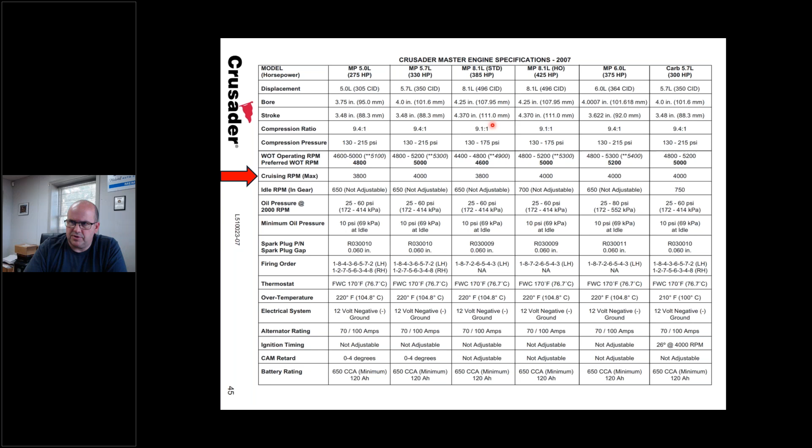So here I am on this sea trial. This happens to be an 8.1 that we redid over the last winter. We're just kind of cruising here about 3,800 RPM. We got a little over 40 pounds oil pressure and we're about 140 on the temp. I'm making sure all that stuff works before we go anywhere.

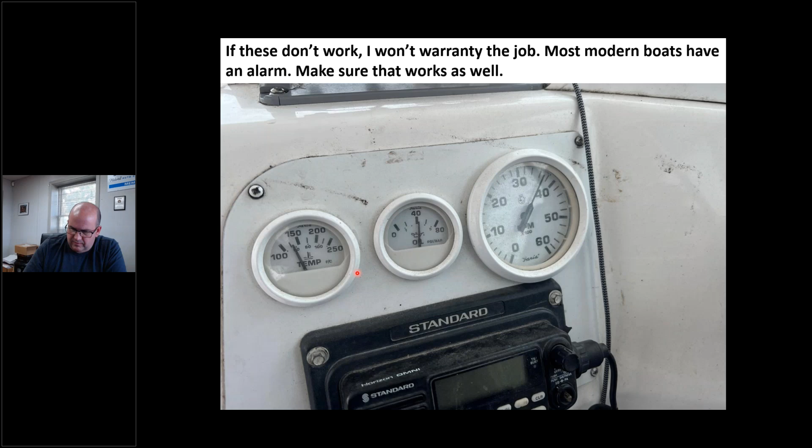I do want to make a comment about some certain gauges. One nice thing that Volvo Penta has done, and I believe Mercury Marine does this too, I can't confirm that, but with the E-Controls controller, EGC and Crusader, if the master slave cable is hooked up, which is basically a cable that connects both engines together via a J1939 CAN bus...

Believe it or not, it'll average the water and oil pressure gauges. For years it's always been a thorn in our side in this industry, especially marine. You might rebuild 2 engines and maybe one engine's got 40 pounds at idle and the other one's got 30. Now most of us engine builders know that there's not a problem with that, but if a customer writes a check for 20 grand, he gets on the phone and says hey man, one of these engines got 10 less pounds of oil pressure. And you know as well as I do, a lot of people judge longevity by the oil pressure gauge. They think a motor that's got 70 pounds of oil pressure, oh this thing's ready to go, it's ready to tear it up. And they think something that's got 10 at idle is the biggest piece of junk. That's what they think, especially on the internet.

But I want you to be aware of something here. I'm not going to read all this to you, but basically they average them together. So both gauges are going to read completely identical in temperature and in oil pressure. If it gets outside of a calibrated number, they will display actual. So if I really do lose oil pressure in one engine, it's not going to sit there and lie to me and tell me that I've still got 45. It will go to actual on both engines. But this is handy.

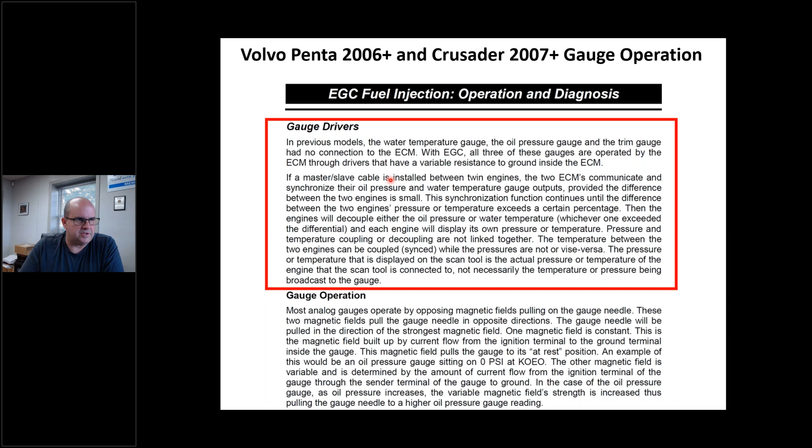I wish this is something we had years ago, because there's nothing worse than a customer saying one engine's running 175, the other one's 165. It's annoying. But I want you to know this is out there, all right? Because you might sea trial a vessel with something like this and think you did the best job in the world, these things are identical on both engines. Well, maybe it did, but maybe it could be the computer too. So I just want you to be aware of this.

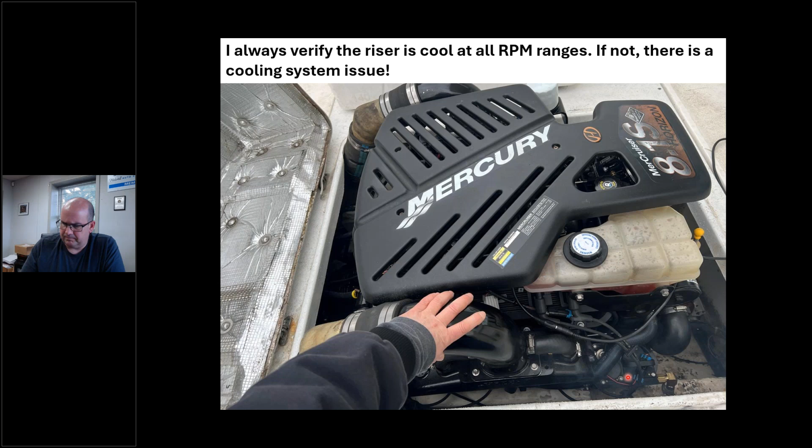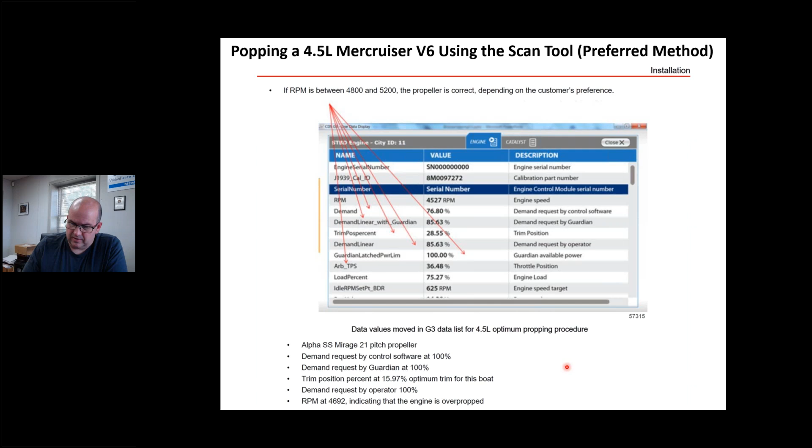And this is basically the same thing. You can read this on your own time, but basically they've got the boat propped right. You see how everybody's 100% here? That's how they can tell they've got the boat propped correctly.

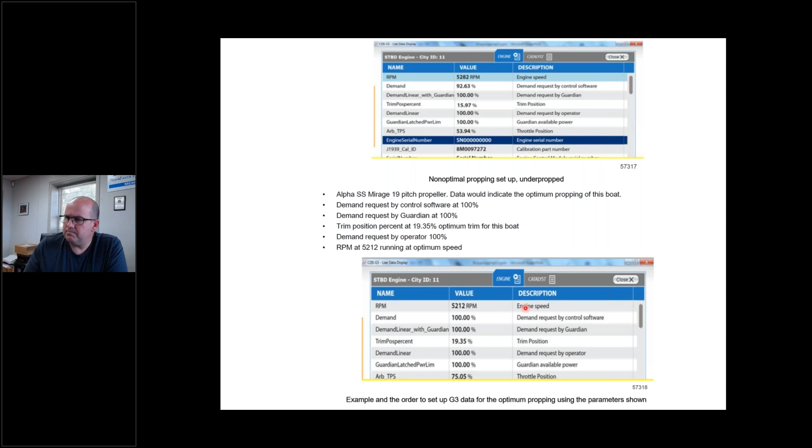But this is what they want you to do, and this is so important. This is why this sea trial is important. We can do the best job ever, we can use the best quality parts, we can put brand new parts, whatever it is. If this sea trial is not done and this thing's not propped right, it doesn't matter what I did, because if it fails, it's all over.

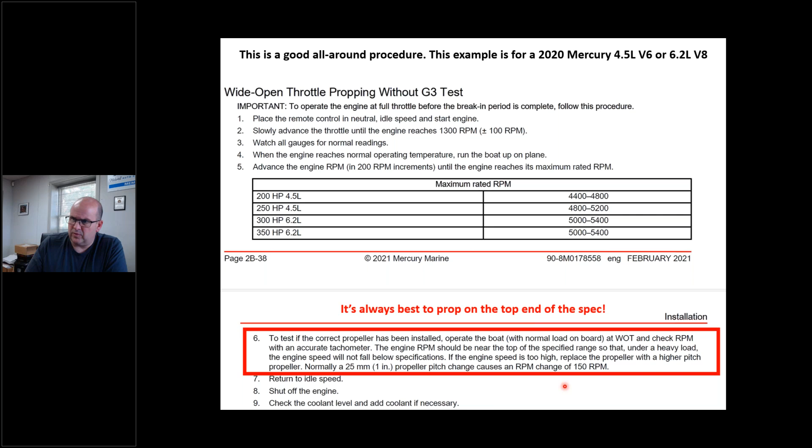Let's talk about high RPM. Why can't I achieve high RPM? I could have something wrong with my engine, that's true—missing cylinder, something like that, fuel problem, ignition timing, whatever. I would say number two is the propeller condition or incorrect size. And when I say condition, people hit rock piles—I just showed you a boat a little while ago where the customer hit a rock pile, screwed the thing up, detonated the engine, ruined everything.

So propellers might look really good to you and me, but I don't have that kind of vision, I'm not Superman. So a prop scan, like an MRI as it's called—if you've got a good prop shop around your shop, those MRI things are very, very good. Or there's good guys with blocks too.

Have them put it on the blocks and make sure, if it's supposed to be a 15x15 prop, make sure that's what it is. I don't care if it looks fine, take it off, get it checked. This is not an eyeball test.

This is something that needs to be checked and balanced and everything else. So one of the questions is, how do I know what the correct prop is? Obviously if you've got some factory info, that would be good. If you know it's a 21 Sea Ray, there's some guidelines, and I'll show you where to get some of that stuff. One of the best spots is a reputable prop shop.

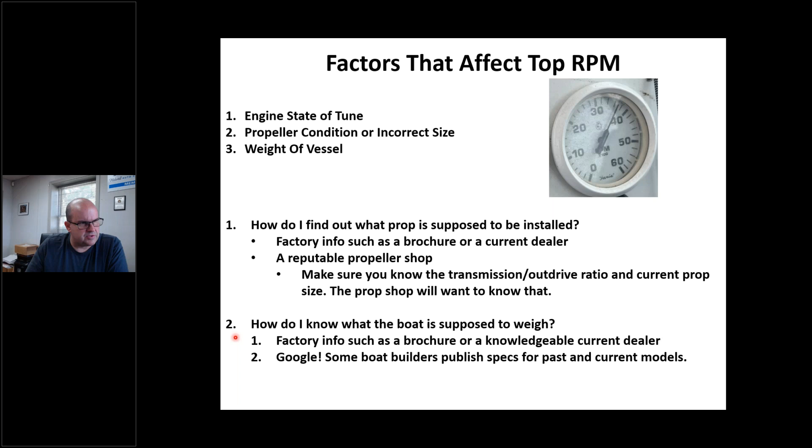And last but not least, we got Google. We use GARP - Google Auto Repair, right? Well, I don't have an acronym for marine, but believe it or not, Sea Ray, which we're going to get to in a second, actually publishes all this information. I'm picking on Sea Ray because there's a lot of Sea Rays out there. But one of the things you can do is go to the Sea Ray website, and I'll show you where to go there in a second.

And this 380 Sundancer 2001 is supposed to have a dry weight of 18,300 pounds. These are kind of nice boats, I actually kind of like these. They're big, you can get diesels in them, but most of these things had 8.1s or 7.4s depending on the year.

But look at this - 275 gallons of fuel, you know what that weighs, right? You got another 70 gallons of water, the holding tank's 42 gallons. A lot of weight, and honestly that dry weight figure is basically without all that included. So that's pretty heavy.

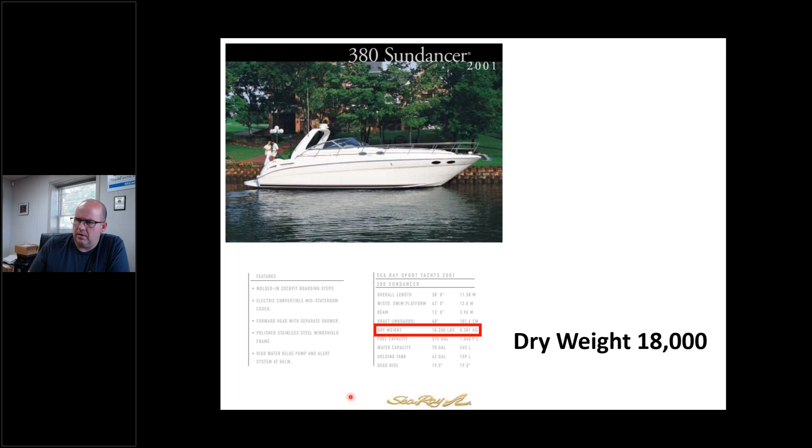So dry weight, we'll call it 18,000 pounds, right?

Here's another awesome document on this same site. You can go back. I just picked this 2004 200 Sundancer, with a 4.3, 220 horsepower. Look, it tells me the ratio of the drive, 1.62. It left the factory with a 14x19 stainless steel Vengeance prop. Vengeance is a Mercury name, and they want it turning 5,000 RPM. That's what that prop should turn. And here's the Sea Ray part number of the prop.

But you can go down through here, there's all kinds of stuff in here. This is handy. If you want to know what something is, to me, this is free information. Anytime I get something for free, I'm all about it, okay?

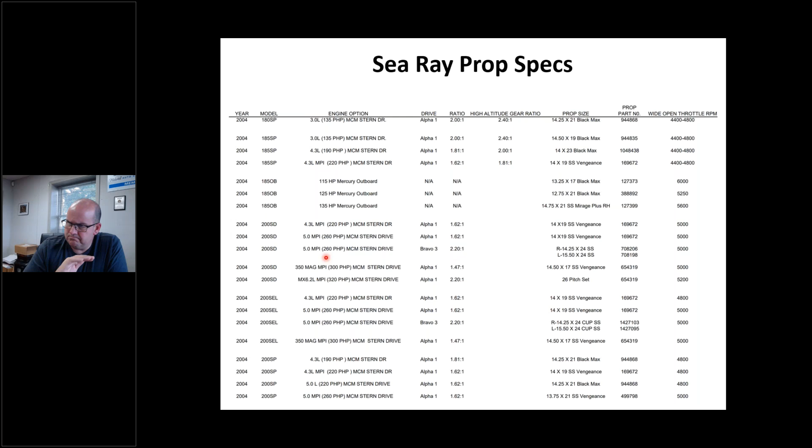Let's bring in a problem child. Check out this 1997 Sea Ray, it's a 370 aft cabin. That's the AC, it's got the drapes, the whole smash in here, okay? Generator, and it's got the 7.4 310 horse engines in it, the L29s. This thing was a dog, all right?

Now, we did not have to do the engines in this, but I assisted the dealer with this. The problem is it couldn't get top RPM, even though it had the props the sheet said it was supposed to have. It was about 400 RPM from the top. This thing can only turn up about 3,800 RPM. This engine should turn 4,200, approximately 4,000 to 4,400 specifically is what this is supposed to turn, both engines. And both engines wouldn't turn up.

Of course, the customer says, I've got the prop that it left the factory with. I bought the boat brand new, yada yada.

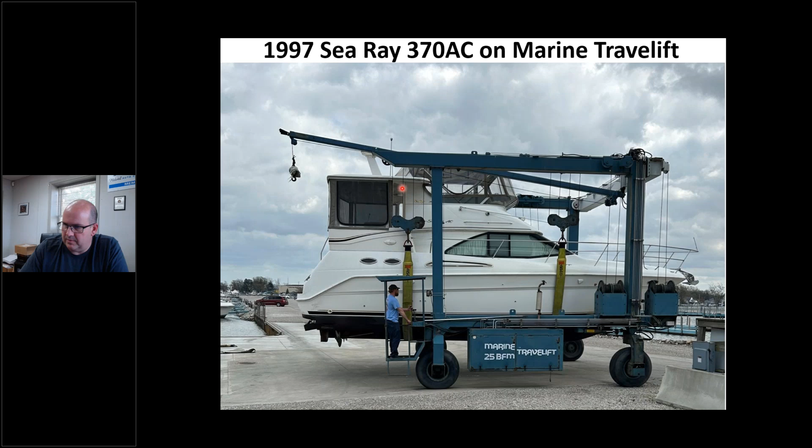The reason I bring this up is these marine travel lifts, if you've got a good marina that actually maintains this, okay, we all know in a marina, just like an airport, the worst things are the ground equipment, the tugs, that stuff. The airplanes are always dialed in maintenance-wise, but everything else in an airport's junk. Same thing in a marina, everything's good except the travel lift, we don't maintain any of that stuff. But 9 out of 10 times, if you got a good marina, there's actually weight gauges on these, and this is an easy way to weigh this boat. I can't take this to the lumber company or our cement place on a trailer and weigh this boat. So luckily, our marina friends here, they've got these gauges.

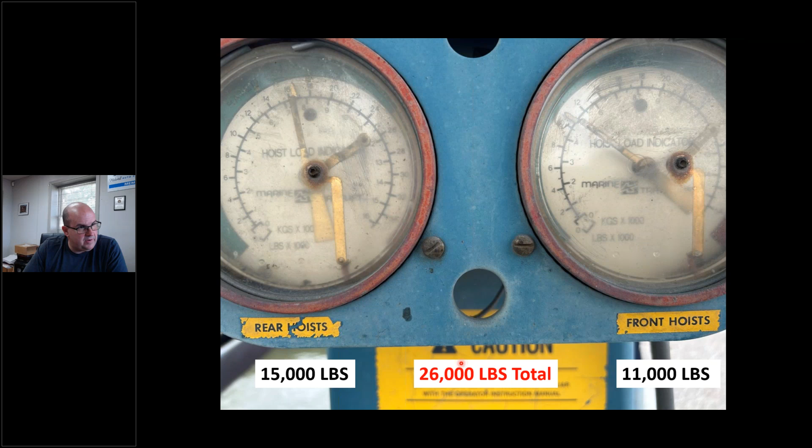On the rear hoist, it's pulling about 15,000 pounds there, and over here it's about 11,000. So this boat weighs 26,000 as is. That's heavy. Okay, what's it supposed to weigh?

You go to searay.com and you click owners, there's an owners tab right here, and they got new boats in here too, they got parts manuals, all kinds of interesting stuff. You click Marine Archives, and then I select, 1997, and I select, it's 36 to 50 foot, and then guess what, here's my sheets. So I click the 370 aft cabin and it says, hey Chris, 23,800, is what this boat should have weighed.

Would you say this is 2,200 pounds over, this thing's over a ton heavier? I mean, you think that's a lot, and that's with no people, no beer, no food, no fish cooler, nothing. So just think this gets worse with 5 more people and the dogs and everything else. So right now, this thing is already overweight.

So you know what has to be done? This boat needs to have pitch taken out. I know what the gospel said, the gospel said it was supposed to have a 22 by 22 or whatever. But you know what, we had to take a couple pitches out of that. It did slow the boat down a little bit, but I told the customer it's the only way it's going to live. As an engine builder, I can't account for this. I cannot account for this. If you want stuff to live, this is what you got to do.

I just want to show you other things other than an engine that can affect top RPM and could cause repeat failures. Because I'm sure all of you agree that that's heavy.

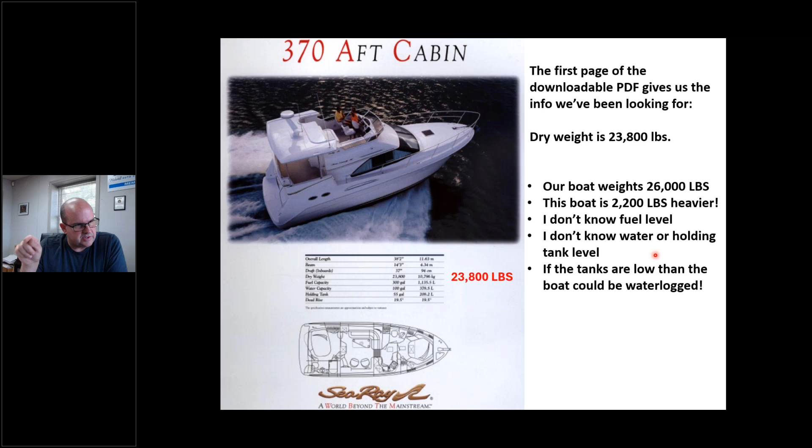I'm not going to say it's common, but it does happen. So now you're thinking, well, the boat's junk, right, full of water. Well, this boat belonged to a friend of mine, because it flunked a survey when he tried to sell it. It's a 1998 Tiara 400 Express with a pair of 3208 Cats in it.

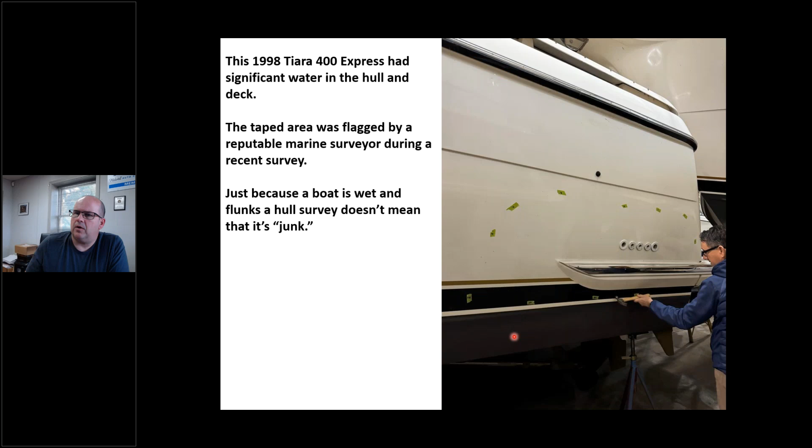But there are procedures to fix this. You see over here they actually taped this out, and they're going to cut this out. I'll show you what they're going to do. They have a system where they blow air in here to dry this thing out. This boat's a 1998, actually a very nice boat, but there are fiberglass technicians that can fix stuff like that. Just because this thing is all waterlogged doesn't mean the boat is a complete piece of junk. Some of this stuff can get fixed.

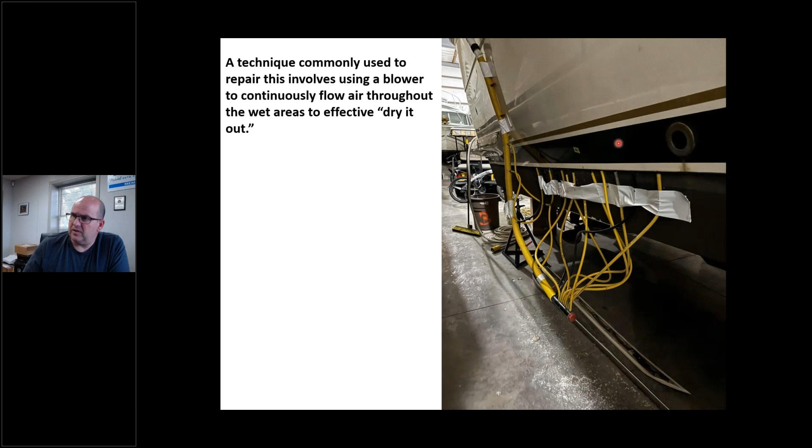See, they cut a hole in the inside here, they'll chop that out and re-glass it. Look at all these little hoses - they're going to blow air in here over the winter. This is in a heated storage facility, and they're going to dry this thing out.

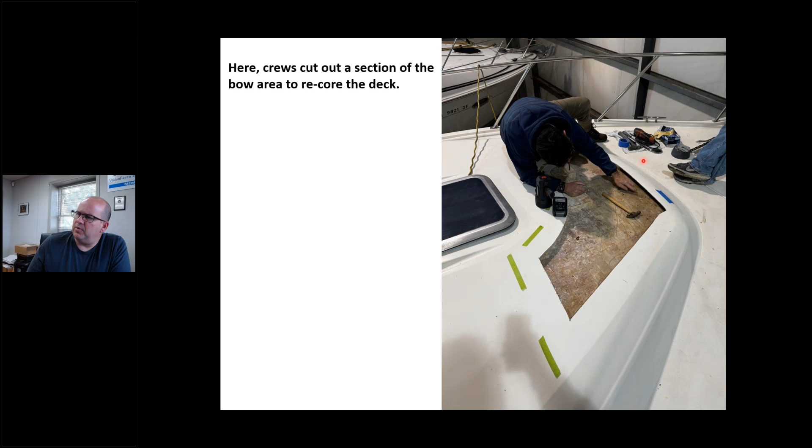The deck up here was soft, full of water - real common by the anchor. So these technicians cut this section of the boat out and they're drying it out. They're actually going to re-core that deck. I just want to show you that it doesn't have to be junk - there are ways to fix it that you probably didn't realize.

So now I'm going to jump into our HVS distributor. We got the boat, we got the top RPM figured out. But I want to talk about this because this is an up and coming problem that's becoming more and more prevalent. Now I'll tell you, this is the world's worst distributor.

These things are junk - plastic housing, nothing but corrosion and moisture content. They're very confusing. This absolutely has nothing to do with ignition timing. I can rotate this thing anywhere - it has nothing to do with ignition timing.

But if I'm doing a long block or starting that motor up, hoping and praying that the marina or service technician is doing his job right, you as an engine builder need to ask this question: you've got to check the cam retard PID. Now everybody has this except Mercury Marine. Well, the problem is Mercury Marine is the most popular engine manufacturer we've got.

So unfortunately, the big man on the street doesn't have any scan tool help for this. I can't tell you how many boats I've been to where this is screwed up, causing popping, causing engines to not run right. You pull cylinder heads off, get tulip valves, put them back on - this doesn't get in right, you got problems. Long blocks, the whole smash.

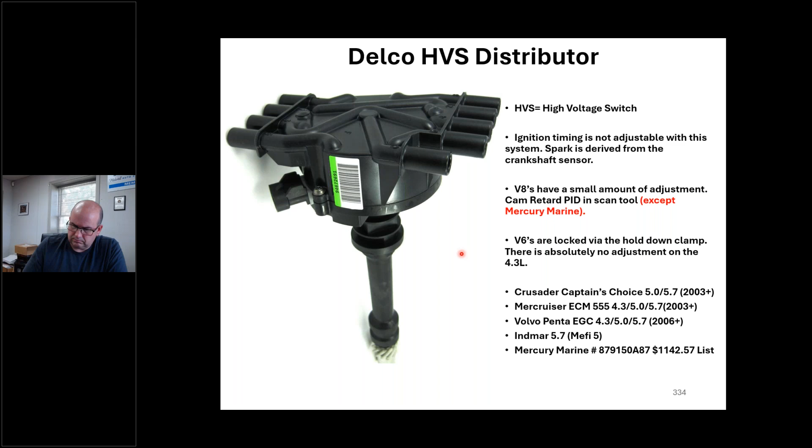I put this sheet in here - I stole this out of a Crusader book. They do make a right-hand rotation engine with HVS. Obviously the whole goal when GM did this, in my opinion, was to keep all the banks on each side of the distributor - left bank cylinders stay on the left side, right bank stays on the right side of the distributor. I think that was one of the goals with this cap.

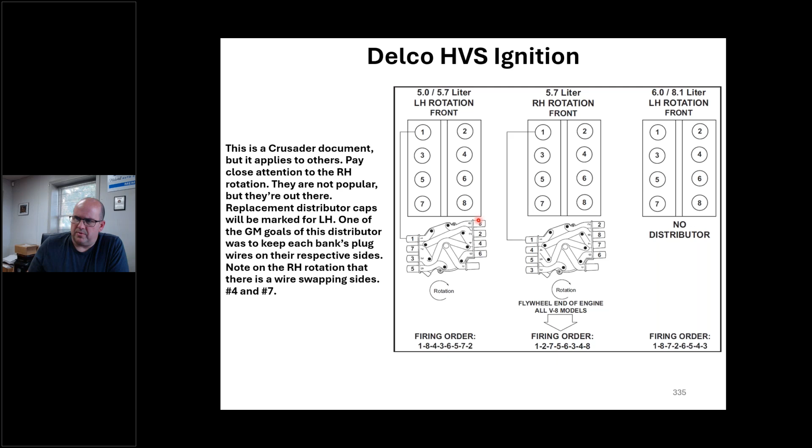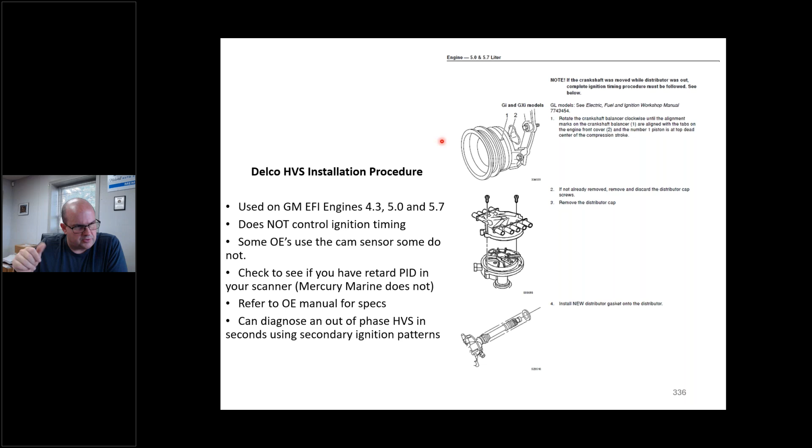It turned out not to be a good system. I'm not going to go over every single bit of this, but I did put it in your handout. This is the GM procedure that's in the service manuals - Mercury, Volvo Penta, Crusader - on how to install this distributor.

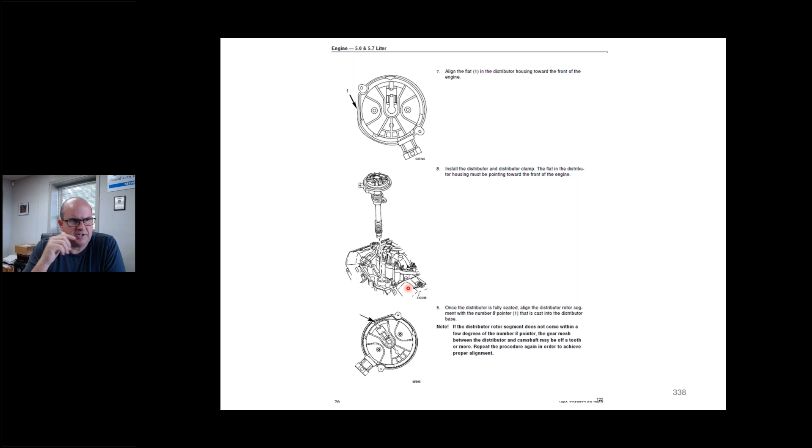Bring number 1 up on TDC. There's an extra dot drilled here, and there's a white paint mark. They tell you how to line the oil pump shaft up, because the problem is you don't have a lot of rotation here. You've got to get this right. It's very easy to get this a tooth off, very easy. So there's a number 8 that'll be marked there if it's a V8, or a 6 there if it's a V6.

Again, I'm not going to read every ounce of this to you, it's in your handout. Download it, read it. It's good information.

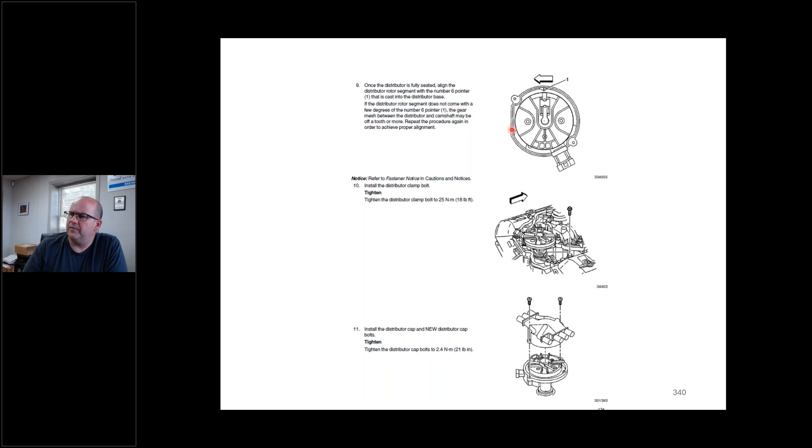I was just at a boat not too long ago that had a brand new, or reman, long block put in it, and it was missing when they got done with it on the top end. The problem was they did not have that HVS index correctly. They screwed around for two months, did swaptronics between the two engines. It was a 31 Sea Ray with 2 V6 Mercs, and they didn't have this in right. That's all the problem was.

If I got an older engine with a Delco HEI ignition, I got to put this thing in base mode, lock the timing out, and set it to base, which is usually 8 or 10 degrees, and lock it down. We don't want to power time this stuff. For the ECM to control timing correctly, I have to have base set correctly. That is super, super, super important.

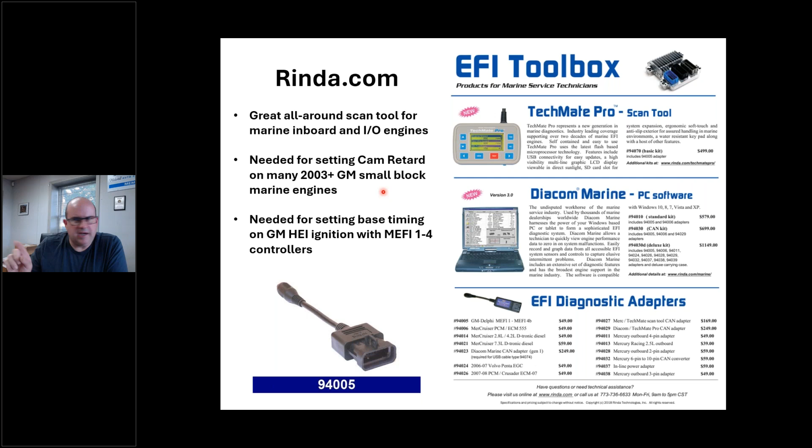But on my 2003 and up small blocks with HVS, I can use this to set cam retard, except Mercury Marine. When I go to the data screen - this is an engine that we rebuilt, and I fired it up for the first time on the floor. It sounded good, ran okay. But look, my spec on this engine is 43 to 47 degrees, and look where I'm at.

I'm at 18. That's no bueno, we ain't shipping this. So we just adjust this real time, and that number updates real time, and you lock the distributor down - the HVS unit - and I always elevate the RPM and make sure that it's 43 to 47 before it leaves. This is a question you should ask your installer, especially if there's problems: did you check the cam retard?

I got a challenge for you: I bet you go to most marinas and most service technicians, you ask them this, they don't know it. They didn't know you can check this, they didn't know there's an adjustment for it. Not all of them, but a lot of them. This is why I'm bringing this to light. This is super, super important.

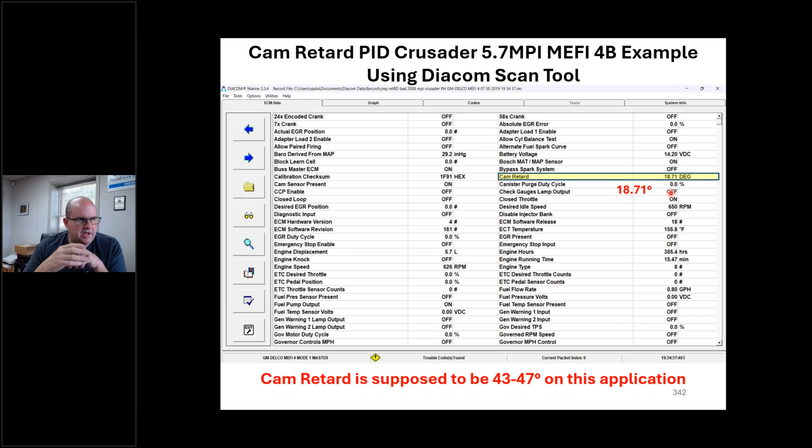That is ridiculous. KV demand should drop in neutral when I rev the engine up. It should not increase. When it increases, I automatically know if it's got an HVS system, the HVS is out of sync. This thing is nowhere near where it's supposed to be, okay?

And what that does, that shortens up my burn time. And that's what creates my misfires, my popping. I've been on boats that sound completely fine, and you'll hear like a pop, like at 3,800, 3,900 RPM. They'll just be sitting there going, and I'll go pop, pop, pop, you know, just randomly.

And this HVS, right? Cylinder heads were done, intake was swapped, whatever, long block was put in. And these guys are going nuts. I mean, they're putting fuel filters in, they're running separate tanks of fuel, they're tuning them up, and this thing's out of time - okay, it's out of sync, I should say, not out of time.

I know everybody doesn't have a scope. I understand that, okay, but I just want to show you what it does to the ignition system, because those coils, the max that they put out is around 30 kV.

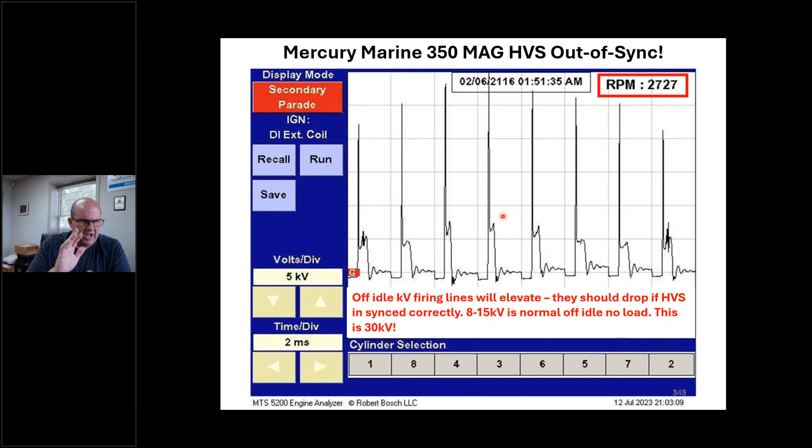And you old school mechanics out there, you ever notice when you had fouled spark plugs or something like that, and you take the insulated pliers and unplug the spark plug, and you watch the spark zap the plug, the miss went away? It's because you drove the KV demand up, right? That KV demand can sometimes get through that fouled spark plug. I know it's an old school tip, but same thing here, right? Elevate the KV, but nothing left to burn.

So we adjusted for the lowest KV. Mercury's got some internal bulletins on this, and it's even in the service manual, right? And they basically say, hey, if this HVS is misindexed by only a small amount, it may cause a misfire, but only at a certain point of spark advance. Okay, and they're right, they're 1,000% correct, I can assure you.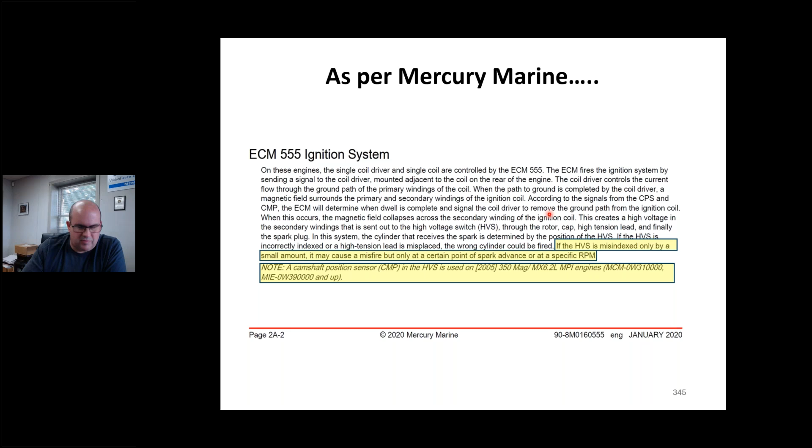Okay, and it basically says, I want to hit this home, right? Timing is not adjustable on any ECM engine, right? Rotating the distributor from its properly indexed position is going to cause the spark to jump to the wrong tower, or it's going to take everything it's got to get it to go. All right, very, very, very important.

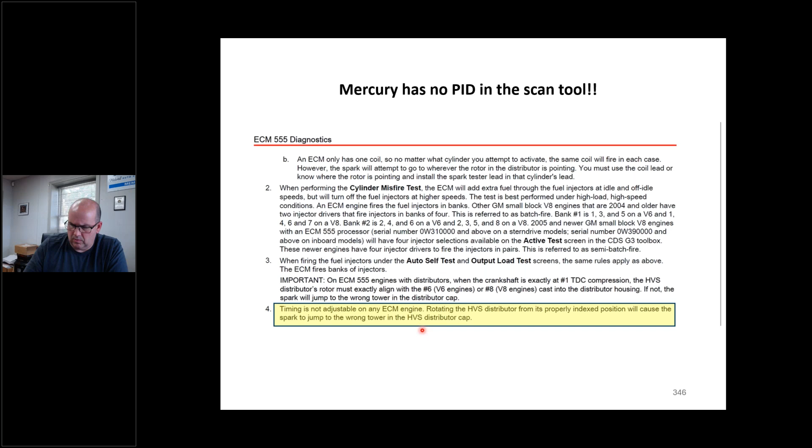Okay, now Mercury releases a TSB in 2011. I'll be honest with you, I've never used this. I know technicians that do. I use the scope, but the reason I'm bringing this up, and I'm spending a little bit of time on this, is because let's say you're building an engine, right?

I'm building an engine, and a lot of times we get long blocks. The distributor comes with us, right? A lot of people like to send engines to the machine shop with everything together. And if I'm putting that distributor in, I don't want to be the guy to be blamed that said it's not indexed right.

Well, I know there's not a lot of Radio Shacks around, but if I go order a couple things, I can order this cam sensor plug, okay, and I can order this 470 ohm quarter watt resistor and an LED and a holder and all this stuff. I can fab up a little winky blinky light here. And if I follow basically what I can do is this thing is self-powered.

Once I bring the engine up to where it's supposed to be, I can adjust this distributor so this light comes on, and that can lock it down. So if you're doing a lot of these engines and don't have a scan tool or don't plan to buy one, this is a good alternative. You can use this on anybody.

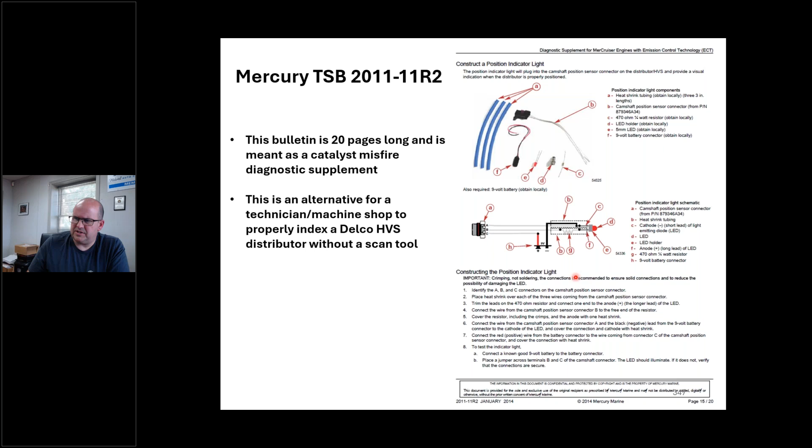You can use it on Crusader, Volvo Penta, anything with an HVS. You can do this on a car. You're building a car motor, you could do the same thing if you wanted to. Okay, because the phasing has got to be correct. I'm not reading you all these things, okay?

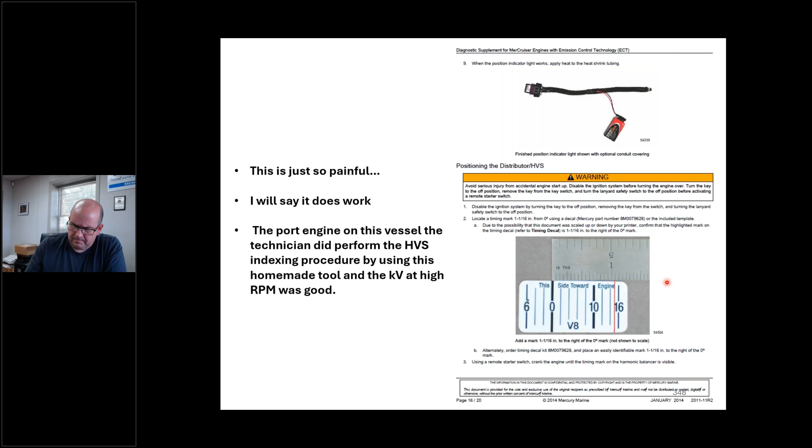They've got these decals you can buy, or you can mark it. They've got a little ruler in here that you mark the balancer, because you don't do it right at TDC number 1. Again, I'm not reading it to you, I'm just putting all this in here. It's right out of Mercury Marine TSB, and it applies to many, many engines.

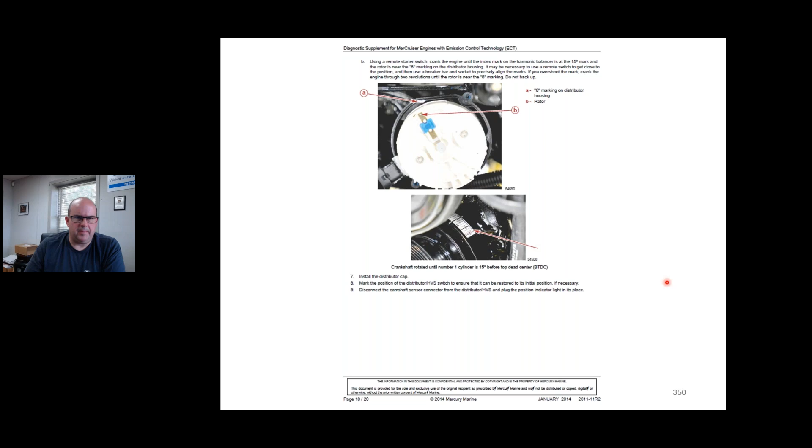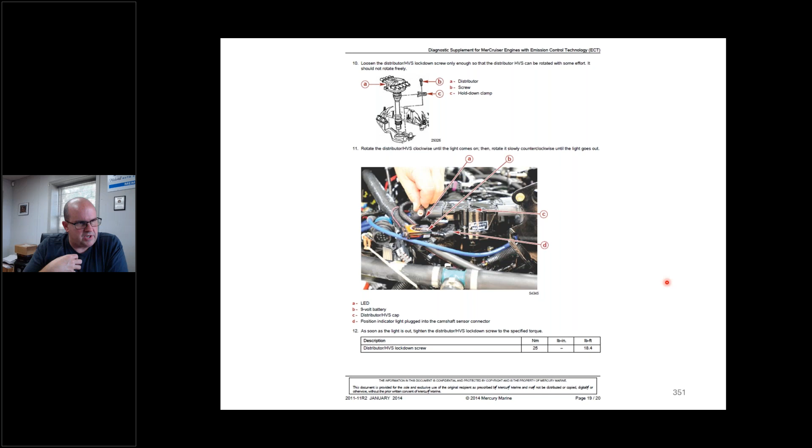And I see this screwed up almost once a month. It's just non-stop headaches. This thing is a real pain in the butt, okay? And I don't want you guys, engine builder or consumer—I know we might have some consumers paying attention too—I don't want a consumer looking at this going, how do I know this is right? And again, you don't want a misfiring engine or an issue, find out the HVS wasn't indexed correctly, right? It kind of makes us look bad.

So again, I'm just putting this information in here for your benefit, so you know. Now, of course, the engines we can check cam retard on, like the Crusaders, where do you get the spec, right? So I'm putting the specs in here for you, most of them. If I got a MEFI4, it's 43 to 47, and that's what a MEFI4 computer looks like if I have a Crusader. I fire up the engine, and again it tells you right here how to do it, okay.

If it's an ECM07 computer, which is made by E-Controls, the spec is 0 to 4. And this is why this is confusing. This distributor is still lined up the same, but the way the software infers this is different. Because would you agree that 43 to 47 is a lot different than 0 to 4?

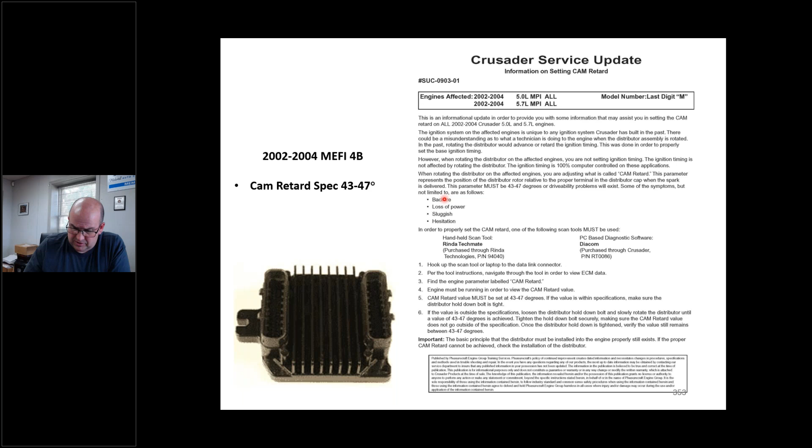I mean, it's got nothing to do with ignition timing. It's got everything to do with how the computer sees the phase relationship of the cam sensor versus the crank sensor. But I want you to be aware of this. This is not—if you're a Chevy truck mechanic, old GM drivability tech—these things were always 0, right? 0 plus or minus 2. The V6s were usually like -5 or -7, something like that. But in the marine world, they're all over the board, all right?

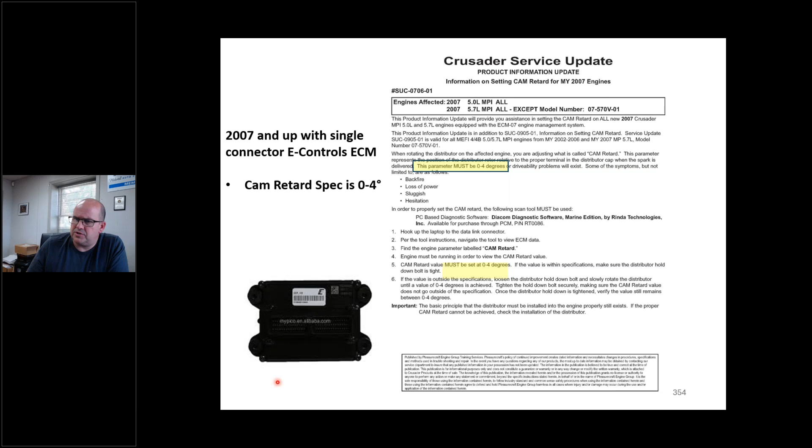They do a lot of gaseous work, propane vehicles and so forth, and a lot of stuff for forklifts and industrial engines. I don't know anybody there, I just know who makes this computer—that's what that E is. But you can see this computer looks eerily similar to this, okay? But I got a completely different spec. So I just want you to be aware of that.

Again, if you've got questions on this, get a hold of me, I'll try to help you with it. I stole this out of one of our diagnostic classes—on an EGC engine, I need both cam and crank to start the engine, okay? And I put some notes in here: -4 to -7 on a V6. The 8.1s read 0 since they don't have a distributor. We got that, you know.

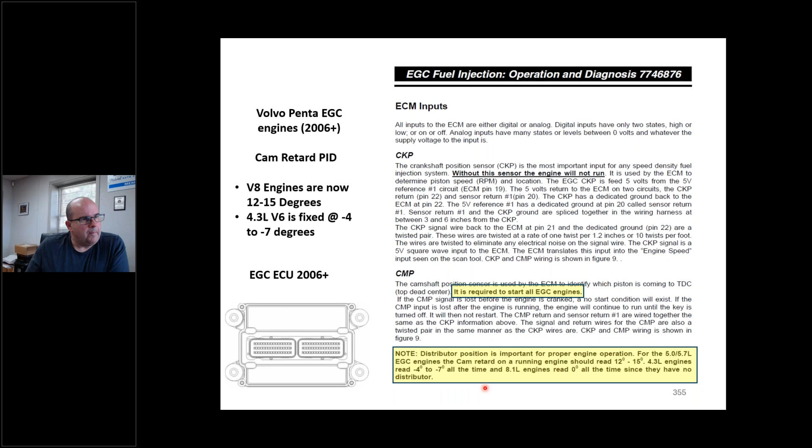So again, look at this—this is a MEFI 5. This is an Indmar engine, very popular in ski boats. Look at this, 705 degrees is their spec, you know. They're not 0, they're not 12 to 15, they're not—you see where the confusion sets in here? This is a pain, this is a pain, okay?

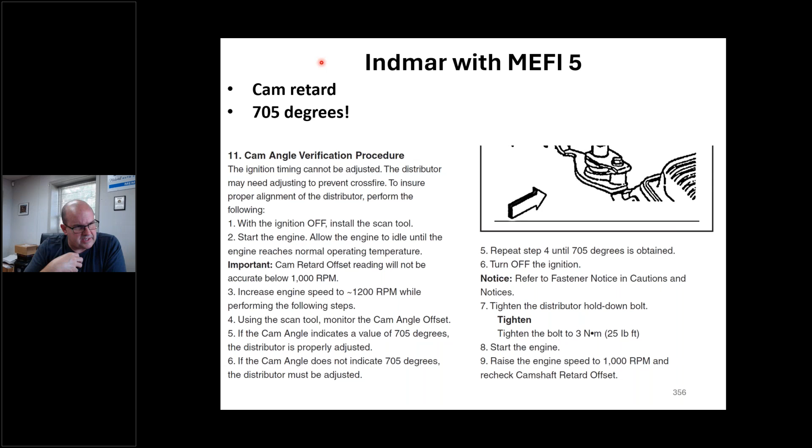You gotta know this, right? If you don't know, call the dealer, call the marina, call me, I'm gonna try to get this for you. I just want you to be aware of this, okay? I know this is not completely a diagnostic class here, but as engine builders, we're kind of tasked with this sometimes—sometimes we have to be a diagnostician when the marina can't figure it out, okay?

Let's jump into some transmission stuff now. This happens to be a Velvet Drive. Paragon's similar on the cast iron stuff.

The reason I'm going to go over this is because I see a lot of mistakes here, and it affects the engine. You'll see on this pump there's a top with an arrow this way, and down here, kind of hard to see, there's a top with an arrow that way.

I want to make a really clear statement here. I can flip this 180 degrees, right? I got 4 bolts here. I can flip this thing 180. All that's doing is allowing it to pick up fluid.

So this is a rotor pump, right? It's got a gland in it. It's the only thing it's doing. It does not switch prop rotation. I repeat, this does not switch prop rotation. This is only to pick up fluid.

This is a 50-50 shot, okay? The flywheel better be going this direction as it's bolted on the engine. If I mix this up, I got 3 neutrals, okay? It's not gonna have any fluid pressure, it's not gonna shift, 3 neutrals. If the transmission is shifting, I got forward and I got reverse, or I'm going one way or the other, the pump is indexed correctly for the engine that it's mounted to.

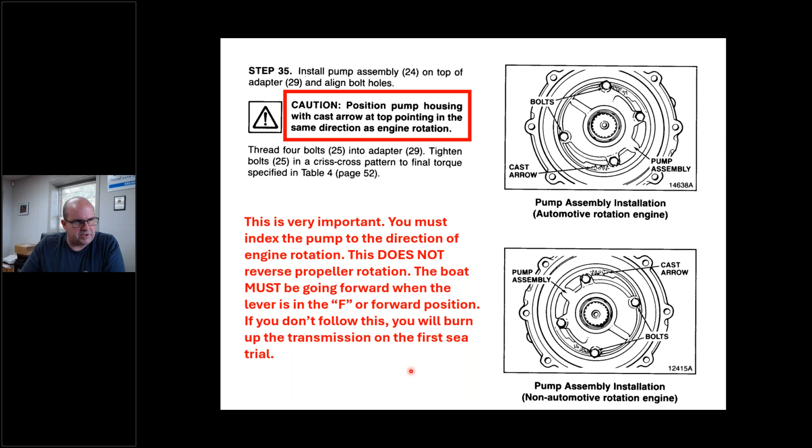So this is basically what I just told you. I want to put this in here because, again, this is always something that is screwed up. I deal with this 3-4 times a year, minimum, okay? And I want to talk about another ratio. You see there's a 188 and there's a 191.

These are reversing ratios. That means I can have a right-hand rotation engine, and that means forward gear is going to output left hand. So that means I have to have a left-hand prop on a right-hand engine. Kind of confusing, but you got to know this as an engine builder. I got to know what's going on, right? Sometimes these guys think that you can switch some stuff with some transmissions.

This transmission here puts a monkey wrench in it. So for instance, generally speaking, on a flywheel aft engine, where the flywheel is mounted directly to the transmission, which is conventional, the opposite rotation right-hand engine is going to be on the starboard side. And then the automotive rotation engine is going to be on the port side, left hand.

But if I have a 188 or a 191 transmission, it's reversed. The opposite rotation is now on the port side. The water always goes away from the boat.

We talked about this back in April, if you watched, and again it's in your book. You can go back and go through this book, I explain all this, but I wanted to touch on this transmission. This is very, very important. It is confusing, but I just want you to be aware of this.

There are transmissions that reverse ratio. These are V drives. This is a cast iron V drive. Same thing, the same rules apply as that pump.

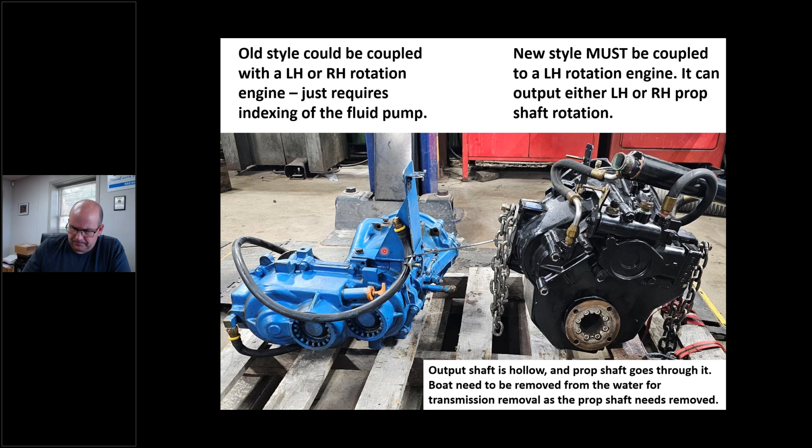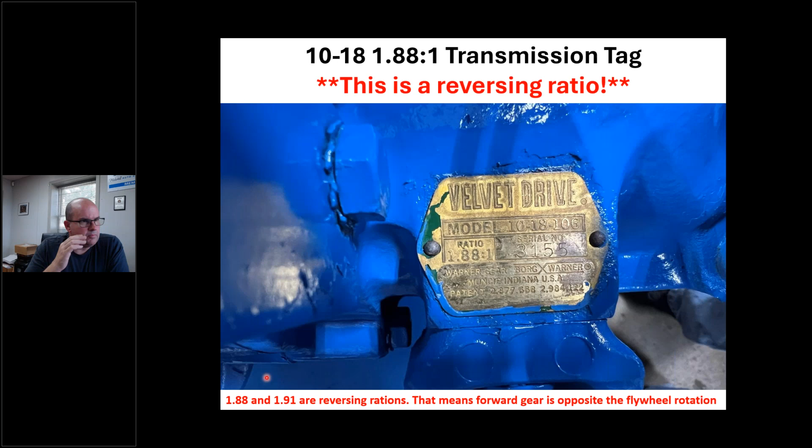This transmission here, I can't do that. And if I go back to this, I want to make a statement: any ratio but 188 and 191, forward gear is going to match crankshaft rotation. In other words, if I've got a left-hand crankshaft rotation, then forward gear is going to spin a left-hand prop. Period, no exceptions.

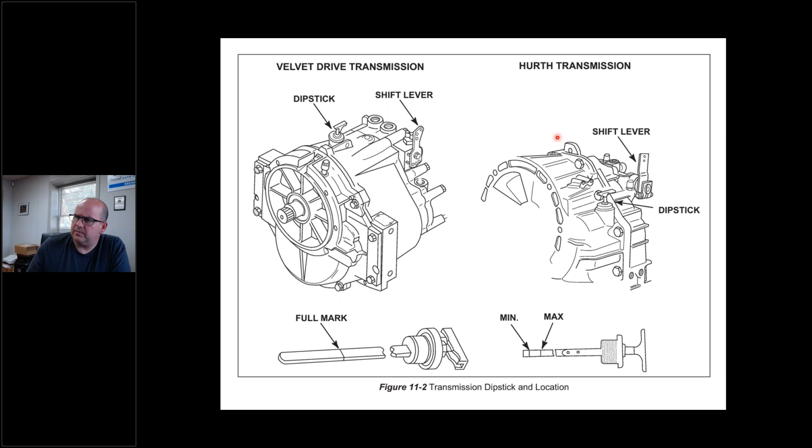These are the aluminum transmissions. Dipstick, shift lever, Velvet Drive - they look similar and do interchange somewhat, but the mounts are different. This is a Hurth 63 series.

Only problem is, I know you're not boat builders, but they're reversed. So for a left-hand prop, the selector goes forward on a Velvet Drive, but it goes aft on a Hurth. I know this is confusing and not really needed for engine builders, but it's to let you know both of these transmissions must have a left-hand engine, automotive rotation, but they'll output either direction, no problem.

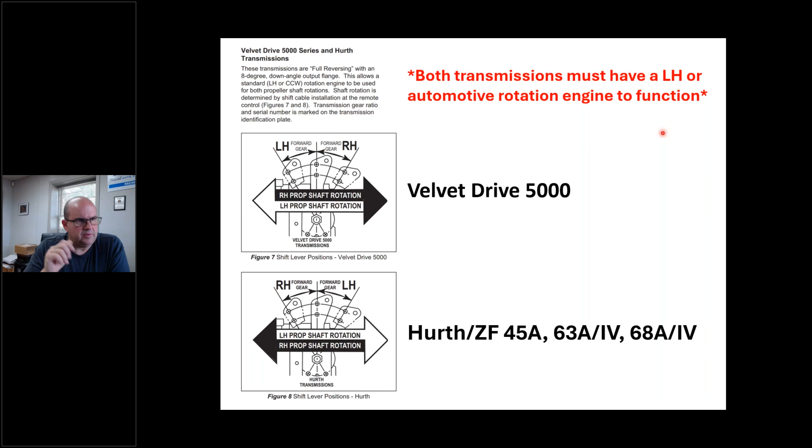The cast iron transmissions cannot do that. The aluminum ones can.

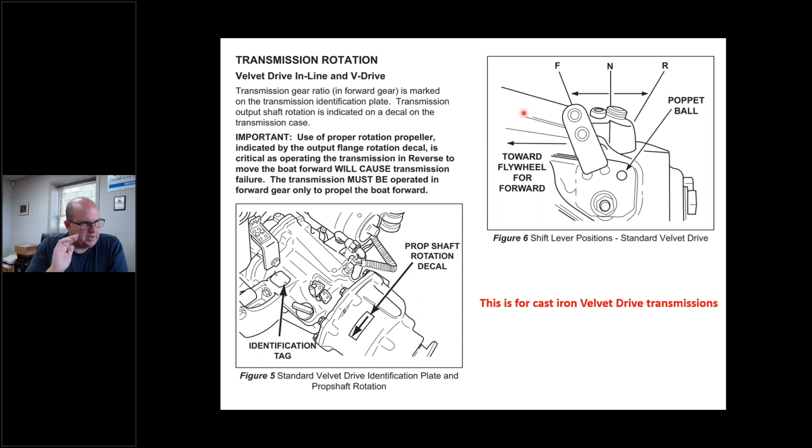Same thing here - on the case there's an F. When this lever is going towards the flywheel, it must be going in forward gear. If it's not, I'll burn the transmission up on the sea trial. So if that thing's going towards the flywheel and the boat's propelling forward, it's right. Very important, very, very important.

Here's a product installation manual talking about prop again with the transmissions. They're basically saying, hey, 1 inch of change in the prop is 100 to 200 RPM. That is true, I just put that in there for you. And there's some more prop shaft coupling information in here in case anybody wants it.

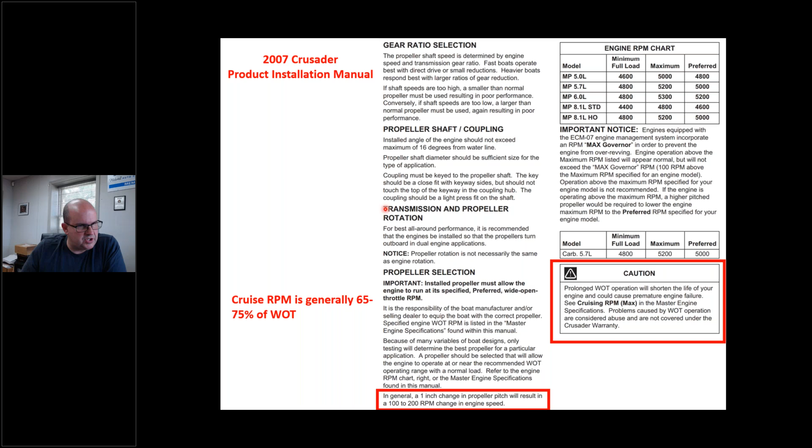In the ski boat world, I know there's a lot of ski boat stuff. There happens to be this PCM pleasure craft model 40 or model 80 transmission. The interesting thing is these always had left-hand or automotive rotation engines, but they always output a right-hand prop, with an 8-degree down angle right in there. I've only seen these in ski and wakeboard boats - that's the only thing I've seen them in.

They might be in other stuff, but I just want you to be aware that just because it's not a Velvet Drive or a ZF Hurth, PCM did make their own transmissions in some of these ski boats that run the opposite way. I cannot put this on a right-hand engine. If I put this on an opposite rotation engine, I've got 3 neutrals. Just want you to be aware of that.

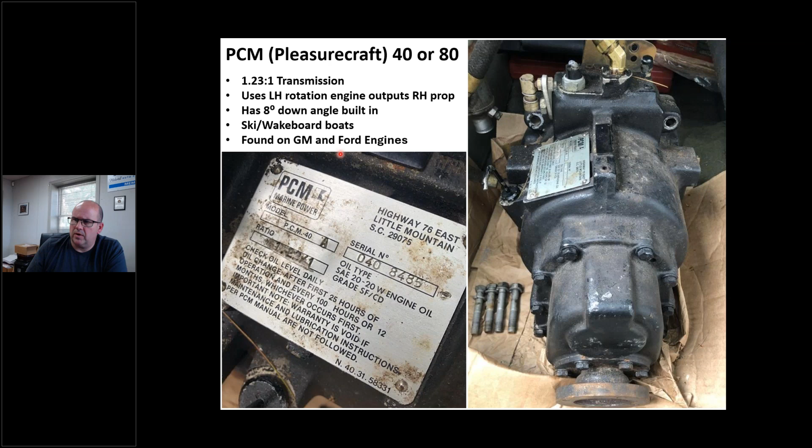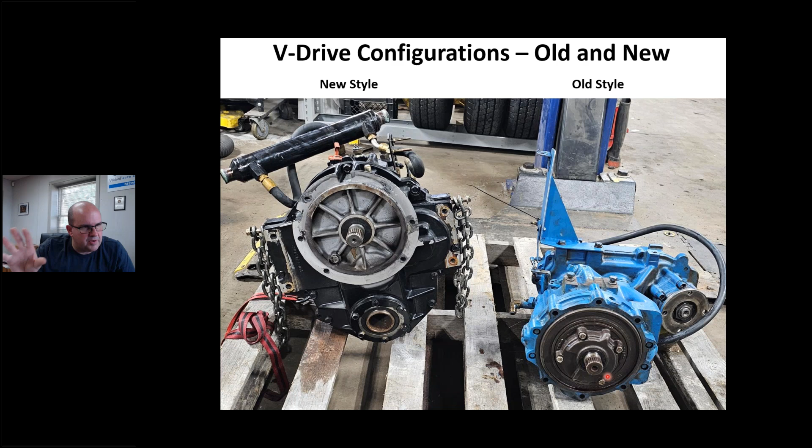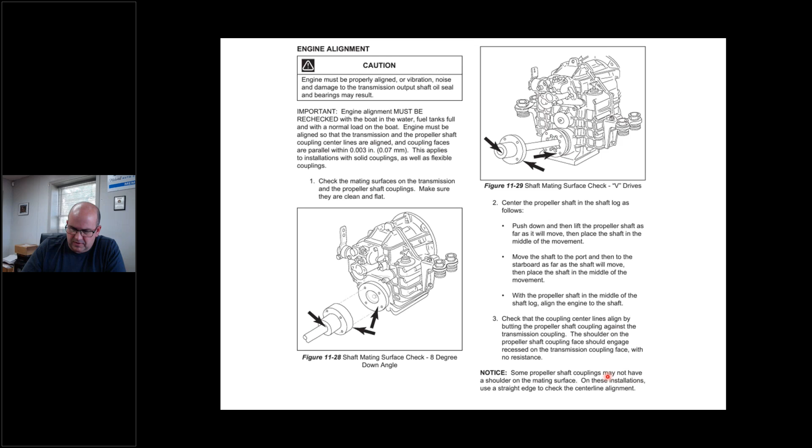Same thing here, I put this in there about engine alignment. I'm not reading it to you, but it just shows you what you need to be doing when you align an inboard shaft. If you've got a vibration in a boat or something like that, this needs to be checked.

Again, is this popular? No, it's not. Is it out there? Yes, it is. And parts of these are getting really hard to come by. Again, I know this isn't a boat building class, but I just want you to be aware of transmissions that can kind of screw with our engine rotation. If you've got stuff you aren't sure about, reach out to me - I can help you with this stuff.

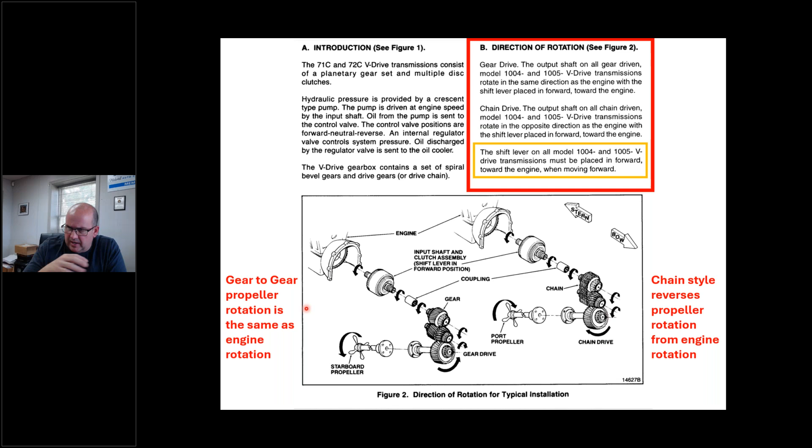To me, to do a really nice job, if you can recreate those decals instead of paint, because a lot of times we put tape over this stuff. This stuff's 30 years old, you peel the tape off, you peel half the ink off with it. So this is kind of cool, just a place that you can get that.

Again, it's in your handout, send him an email, give him a call. It's a side business for this gentleman. Not a commercial, I'm not getting paid by him, but he's got all the decals for the flame arresters, all kinds of stuff. He can engrave tags. If you're really doing a 100-point restoration on some old cool boat, he can do distributor tags, generator tags, all that stuff. He can punch the numbers, everything. The guy is a whiz at this.

So don't be afraid to reach out. If you want to take your job to the next level, make it look really, really good, reach out to these guys, he can do a nice job for you.

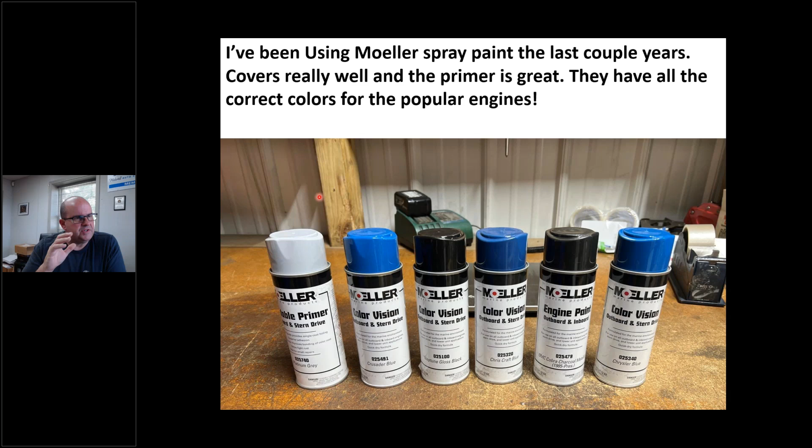We use it, but sometimes we're painting stuff - I'm not picking on Krylon, Duplicolor, or any of that, a lot of times they don't have the correct marine paint. You can buy this stuff from your local marine supply house, I'm sure you can get it online, West Marine, whatever. I just want to show you that this stuff is out there to do the correct paint on some of these engines.